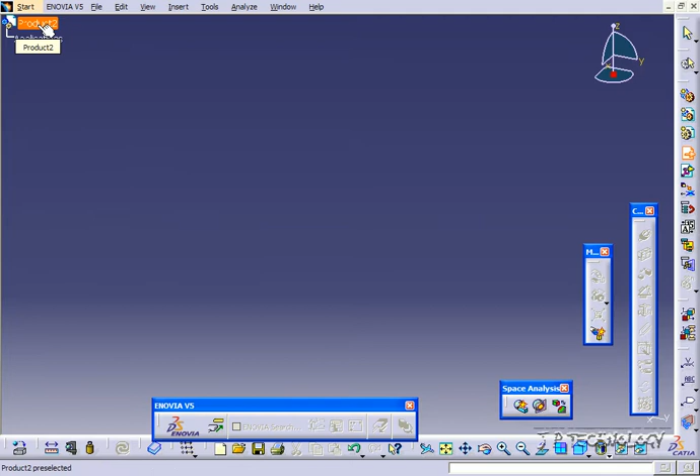Now what you're going to have to do is click the product you want to put it into. So you're going to have to click Product 2 or whatever your product or assembly is called. Now it's going to prompt you to select the part you want to put in. So let's click the base, click OK, and now it's put in the base.

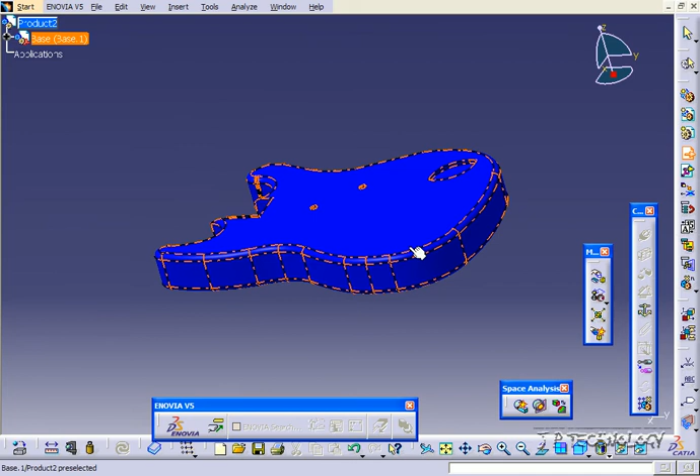Now let's do another existing component. So let's click Insert, Existing Component, and again you have to click on the product. This time let's put in plate, click open. Now the plate, as you can see, is kind of layered on top and squished into the base. So that's one of the problems with doing the existing component just by itself. You're able to throw it in quick, but you don't really have a position to throw it into.

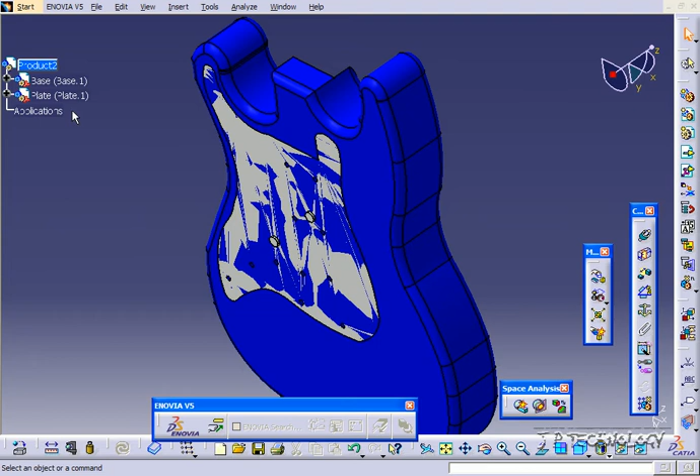So what we're going to do, let's delete this plate. And let's do the same thing, but this time we're going to insert it with position. So click Existing Component With Positioning, click the product, click the plate again, click Open, and now you can see again it's in the same position.

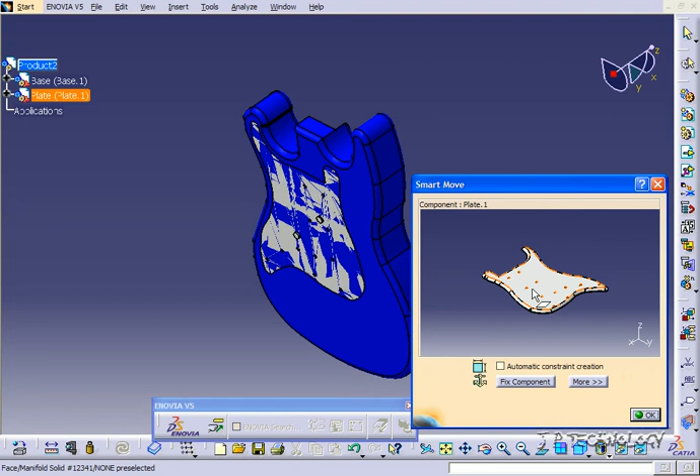So it's kind of like the problem that we have when we're inserting components, is we're going to have it smushed like that. So what you're able to do though is just move it around in here. You're able to just toss it around, or you can even click on here and just move it around. So once you've done that, just click OK. And now both of them are free to click and access and maneuver.

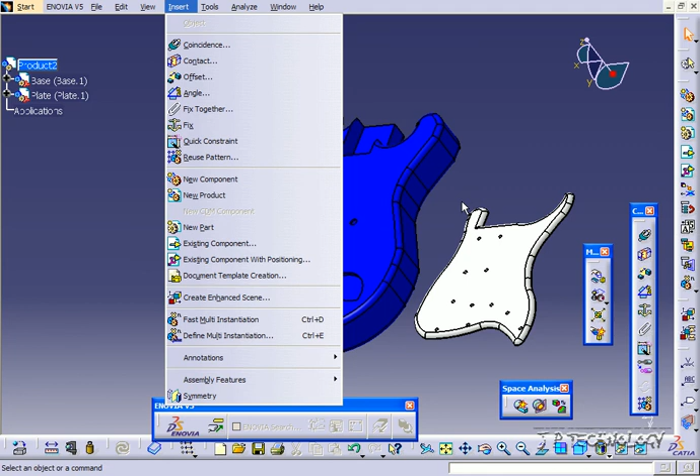So when inserting components, make sure that you click which product you want to put your components into, so which assembly, and then from that you have to insert them. So inserting the component, or you may have to insert with positioning as we had to here, because we need to move it around from the origin, as both of them kind of share the same space in their own component files. They're going to share the same space in the assembly, so you need to move it around before you actually do position it.

And that concludes our tutorial on inserting components within CATIA V5.